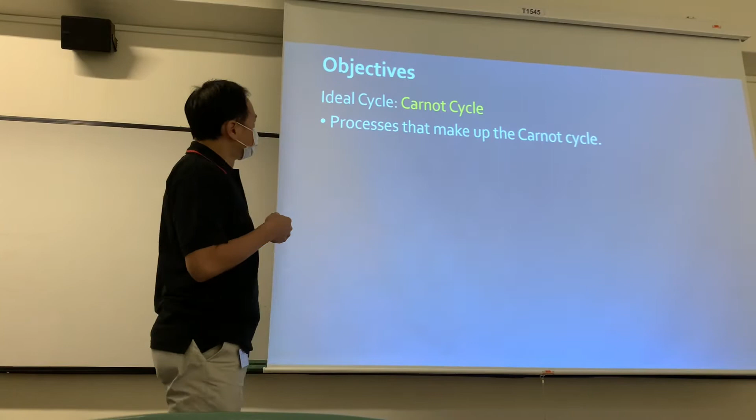Ideal cycle. When we say ideal, what does that mean? Ideal means this is already the best. But best doesn't mean it can be implemented. So sometimes it cannot be implemented.

We're going to learn what are the processes that make up the Carnot cycle, and we're going to use the TS diagram to describe the cycle. This is very important, because what you learned in chapter 2 you're going to apply here, and also in Mr. Lim's class for the gas turbine cycle. You'll learn the Brayton cycle there, and again use the TS diagram to describe it.

It's the same, because the gas power cycle is also part of the power cycle. The turbine cycle is part of the gas power cycle.

After that, we're going to learn the Otto, Diesel, and dual combustion cycles. We'll learn the concept, the theory, and the calculation, and what are the assumptions for these air standard cycles.

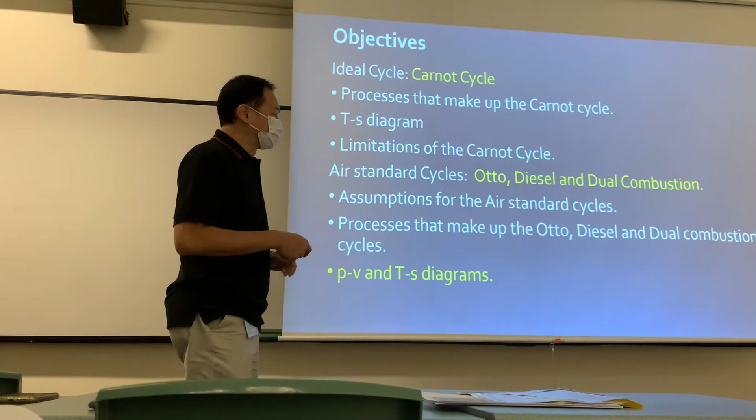The processes that make up the Otto, Diesel, and dual combustion cycles are important because you must memorize them, no choice. It's not like they'll be given to you in the blank. You have to memorize the processes that make up these cycles, and how to draw the PV diagram and TS diagram.

Again, how to draw it. Do you need to memorize it? I would say in a way, yes. But more important is your understanding. Once you understand, you will know how to draw it. Then you solve the problems.

Today I'll try to target finishing before 10 this weekend. That's the target, the first time. I'll try, you do your job, I do my job, and we can still finish in time. Okay, I know all of you are also tired.

Let's start with the first one, the Carnot cycle. This is a French guy who lived quite many years ago, more than 200 years ago. His name is Nicolas Léonard Sadi Carnot, a very long name, so the family name is Carnot.

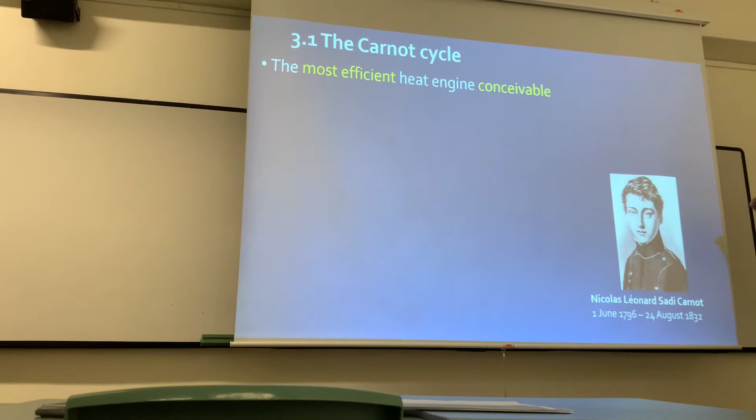So he came up with this idea called the Carnot cycle. This is the most efficient cycle that you can conceive. He was the first one to write this technical paper. He said that if you want the engine cycle to work well, you must have two processes: heat supply at constant temperature and heat reject at constant temperature.

You must have these two processes where heat is supplied at constant temperature—that's one process—then heat is rejected at constant temperature as well. In between these two constant temperature processes, these are constant temperature processes. Fixed temperature means constant temperature, so it's an isothermal process.

So between these two isothermal processes, you have an isentropic process, which is reversible and adiabatic. He said the best cycle is made up of these four processes: isentropic, isothermal, isentropic, then isothermal again.

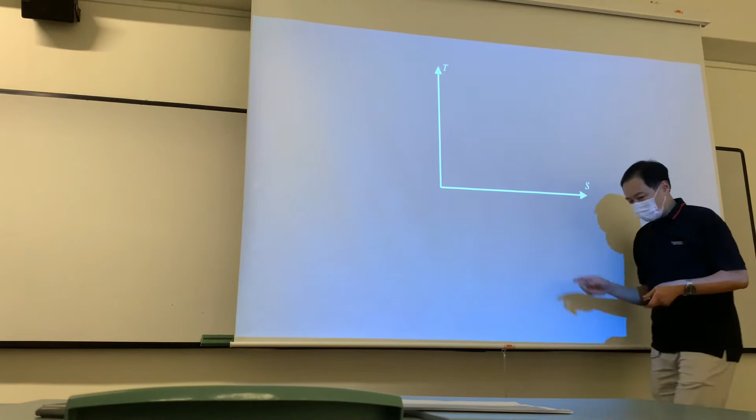In case you ask how it works, basically it works this way. To describe this process, we use the TS diagram.

First of all, we have heat supply at constant temperature, so we call it isothermal heat supply, a constant temperature process. In the previous chapter we said that when a process takes place, the area under the process line is the heat transfer. So this area is exactly the heat transfer. This is one process.

Then after this supply, you have isentropic expansion. This is where the work output takes place. Since it's isentropic, it's a vertical line with no change in entropy: S1 equals S2, the same entropy.

This is followed by another process called constant temperature heat reject, isothermal heat reject. Same as before, the area under the process is the heat transfer—in this case, it's the heat reject. So this area represents the heat reject.

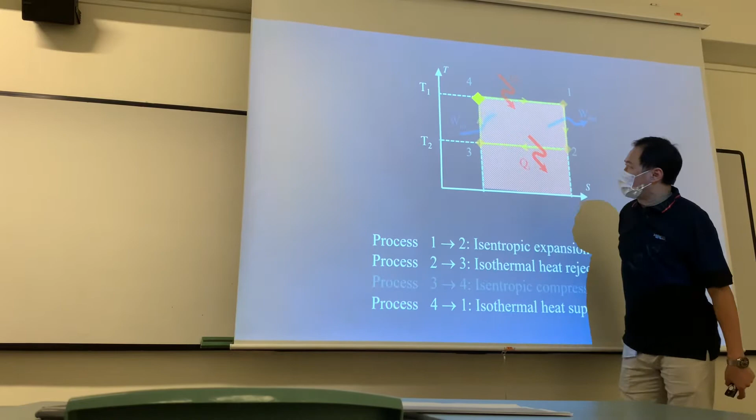Finally, you have a final process called isentropic compression. It's a vertical line again because there's no change in entropy—entropy S3 and S4 are the same. This is where work input takes place. So you have heat supply, work output, heat reject, then work input. This is the ideal Carnot cycle.

Based on what we learned earlier in the first law of thermodynamics, when we have a series of processes and finally return to the initial state, for example, like a car engine cycle, we have a process followed by another process, followed by another process, followed by another process, then the last process. So there are 4 processes that make up this cycle, then it comes back to the original point, back to the initial state. So when you have a thermodynamic cycle, this is one cycle, made up of process 1, 2, 3, 4, which make up this cycle.

When we apply the energy equation, which is the non-flow energy equation, to solve this cycle, from 1 to 2, 2 to 3, 3 to 4, 4 back to 1, the energy equation is Q minus W equal to delta U. Since we have 4 processes, I call it summation. Summation means the sum of all the heat, sum of all the work, is equal to the sum of all the internal energy change.

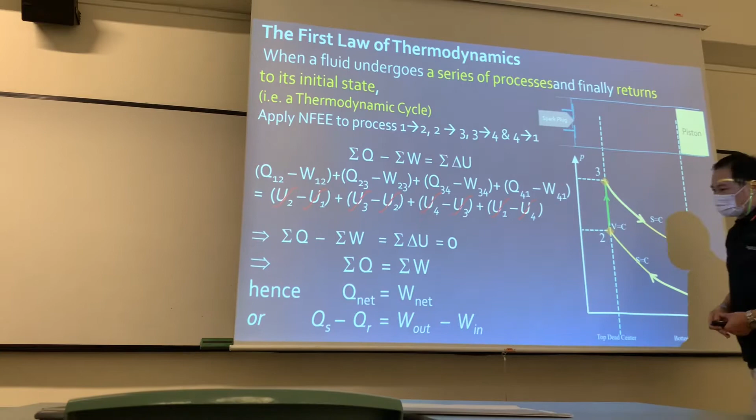So basically, if you want to calculate the net work of a cycle, where we have a process that comes back to the same point again, back to the initial point, you can use the net heat to calculate it. Net heat is the heat supply minus the heat reject. So meaning, if you want to calculate net work, usually we use work output minus work input, but we can also use heat supply minus heat reject to calculate it. We can use either one, the answer is the same.

So with this understanding, let's go back to the Carnot cycle. I think I covered this before, but I just mentioned it once, so in case you didn't understand, I will talk about it again. This is the second time I'm going to talk about this, because we're going to use this concept in our gas power cycle. So I'll start with the Carnot cycle. Just now, the Carnot cycle's T-S diagram looked like this.

So we say net heat equal to net work. Net work is work output minus work input, or heat supply minus heat reject, as I mentioned earlier. And when we want to calculate the thermal efficiency of the cycle, you just use the net work over the heat supply. So net work is work output minus work input, or you can use heat supply minus heat reject, that's why it's equal to heat supply minus heat reject, divided by the heat supply.

So now the question is, can you replace the heat supply and heat reject by the numbers here, T1 and S1, S2, S3, S4? Can it be done? Let's look at heat supply. Where is the heat supply? Heat supply is the bigger rectangle, this area here. How do we calculate the area of the rectangle?

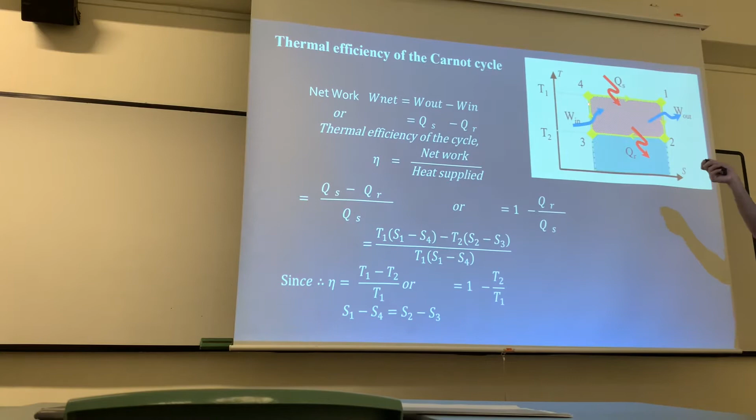So heat supply again below, so you have T1, S1 minus S4. Now look at this one. We said earlier this is an isentropic process, S1 is equal to S2, and here also isentropic process, S3 equal to S4. So basically S2 minus S3 is the same as S1 minus S4. So if these two are the same, I can cancel, so I'm left with T1 minus T2 over T1. Since S1 minus S4 is equal to S2 minus S3, I get this.

So meaning to say, if you want to calculate the thermal efficiency of the Carnot cycle, what you need to know is only these two parameters, T2 and T1. So you can calculate the thermal efficiency of this Carnot cycle. It's very easy to calculate, just based on this. This is the ideal cycle, the best efficiency you can find, given the pair of temperatures - one higher, one lower.

So if this Carnot cycle is the ideal case, why is it not implemented? I will ask you this question: can you heat up air? Let's say I have air. I want the air to receive heat, but temperature cannot change. Do you have a way to heat up air but it cannot increase temperature? But I want heat supply to go into the air. Possible? Almost impossible, I would say.

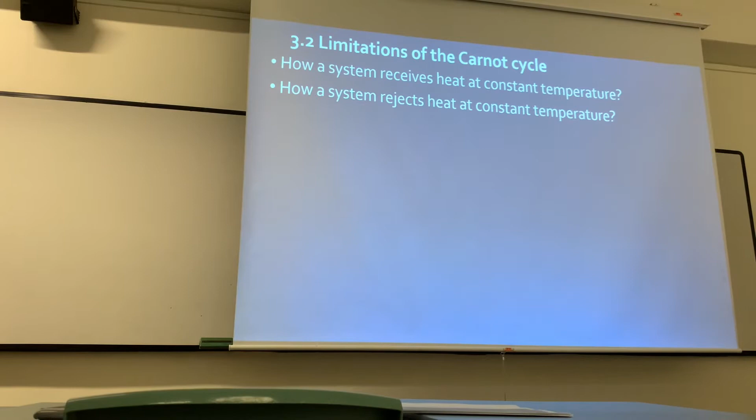So these two alone are already quite difficult to implement for a gas power cycle. It's difficult for the system to receive heat and reject heat at constant temperature. In practice, it's difficult to have a system receive and reject heat at constant temperature. Normally when we heat up the gas, the temperature should increase, and you may also increase the pressure, or you may keep the volume constant or keep the pressure constant.

Another thing is the Carnot cycle has a low work ratio. So what is work ratio? The definition of work ratio is this: based on the net work calculated earlier - I come back to this again - this is the net work, which is the work output minus the work input, or heat supply minus heat reject. So this is the network.

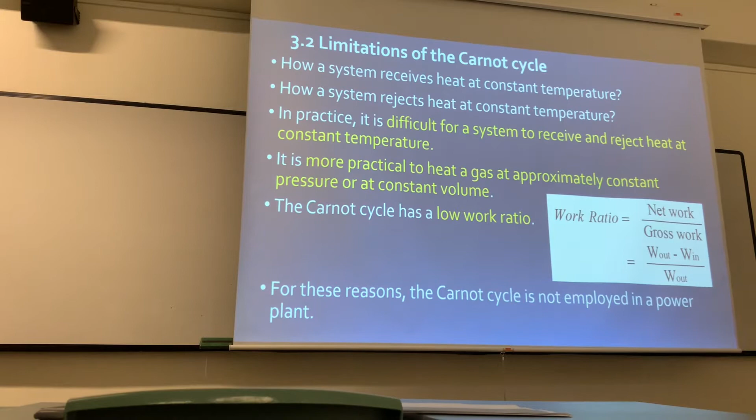So the net work divided by the gross work. What is gross work? Gross work is the work output itself. So work ratio, which is the net work divided by the gross work, the ratio is quite low. That's why the Carnot cycle is also not implemented. This is one thing, but the major concern is that it's difficult to heat up gas or reject heat from gas at constant temperature - quite impractical to implement. For this reason, the Carnot cycle is not employed in a power plant.

For example, in gas power cycle, this is a theoretical cycle but difficult to implement. So you may ask why this Carnot cycle, if people go and implement or publish technical papers saying Carnot is an ideal cycle. The reason is he didn't live long enough. He only lived until age 36. So if given him time, he would have come up with something even better.

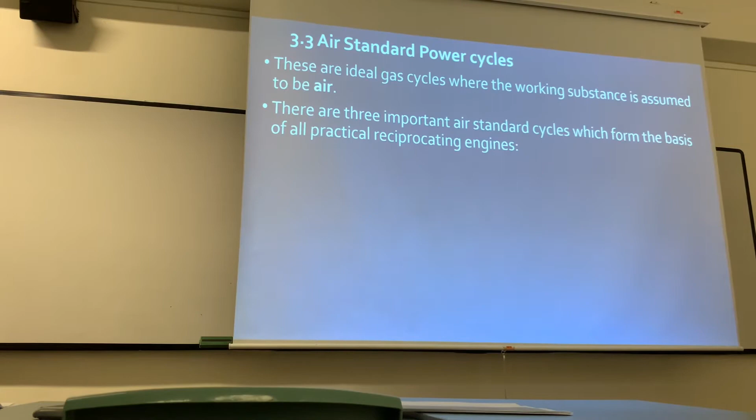So we're going to cover 3 important air standard cycles. We're going to cover these important ones because they are commonly used today, and these are the practical reciprocating engines run on the road today. The first one is the Otto cycle. Some of you may have heard of it before. So Otto cycle is used to approximate the petrol engine.

So you pump petrol, petrol engines run on this cycle. Next, diesel cycle. So diesel, everyone knows - you go to the petrol kiosk, you pump petrol, and there's another pump for diesel. So this diesel cycle is used to approximate the low speed diesel cycle.

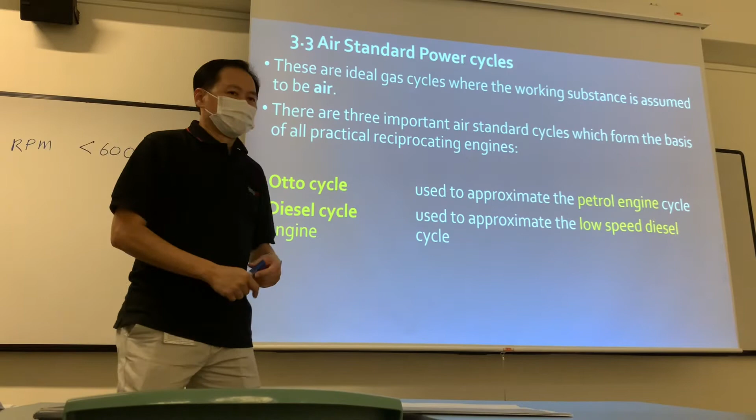So there's a word called low speed. What is this low speed referring to? The low speed, as far as I know, is talking about the RPM of the engine running speed. So during normal running with load, if the RPM is lower than 600 RPM, it's considered low speed. Normal speed is with load.

So then you look at the lorry, taxi, buses, which most of them use diesel engines - they use diesel fuel. Question is, are they running on this diesel cycle if the RPM is lower than 600 RPM? But you look at the lorry, the RPM easily hits 1000, 2000 RPM.

The buses also run 1000 plus, 2000, even 3000. The taxi is even higher - some diesel taxis, you look at the RPM, 4000 RPM also have. So under load, they are running at 4000 RPM. Are they still considered diesel cycle? No. So these are not the kind of engines used on the road for this cycle classification. Then where is this used? I'll mention about this later.

So those running on the road - diesel engines for buses, taxis, lorries - they are classified under what's called the dual combustion engine cycle. These are used to approximate high-speed diesel engine cycles. High-speed means the engine RPM is more than 600 RPM, under load, with running load, not idle speed. Under normal running load, if the RPM is more than 600 RPM, then you classify this engine under the dual combustion engine cycle.

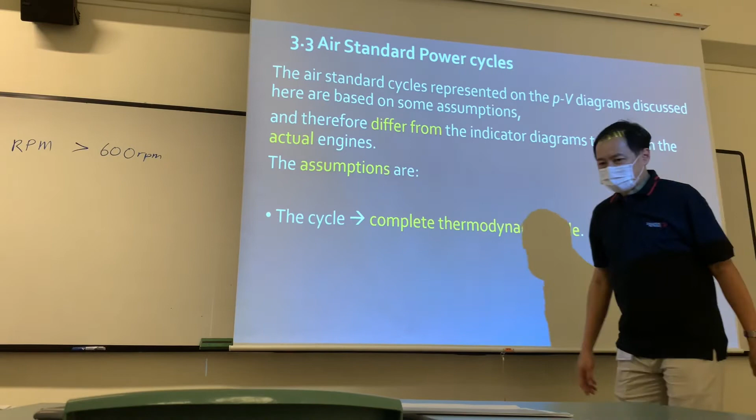And when we say complete thermodynamic cycle, we mean we are assuming the same amount of air in the cylinder, in the reciprocating engine cylinder - this air never goes out or comes in. So it's heated and expands, then under cooling it contracts. So this air is subject to heat but there's no change in chemical composition, no change in properties. So the working substance is air and is a constant property substance.

What do I mean? We do not consider that there is a change in chemical properties because we just treat air as an ideal gas, and the specific heat capacities are all constant. This is very important because this makes the major difference between what you learn here and what you're going to learn in Mr. Lim's class, which is the turbine cycle. Because in the gas turbine cycle in Mr. Lim's class, this is the difference.

I say this air is an ideal gas with constant specific heat capacity. In the gas turbine, we will consider that combustion takes place. What do I mean? I'll give you a simple example. The air that you breathe consists of 78% nitrogen. How many percent oxygen?

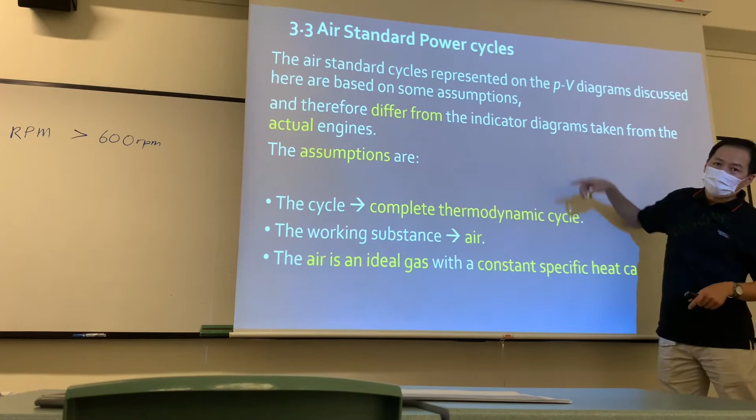But in this chapter, we assume no change because it's a complete thermodynamic cycle. So you just add heat to the air, then the air expands. Then you add work done to the air, then you compress the air, and then you lose heat. Then it contracts, something like that.

There's no change in the amount of air - meaning you do not let the air come in or go out. It's the same amount of air, keep on doing the work. You add heat, expand, then you lose heat, then you compress again, then add heat, you expand. So it keeps doing this kind of thing.

So it's different from the turbine cycle, where air coming in is combined with the fuel, then combustion takes place. Because of combustion, the property of air changes. That's a major difference here.

Also, all the processes in the cycle we study here are reversible. This is also another important thing, because coming to Mr. Lim's class, the expansion process, especially, or sometimes even the compression process, is not reversible, which makes things even more complicated.

I don't want to confuse you, but let me assume everything is reversible, everything is constant, the properties are all constant. So the property of the gas is air, and this air has the same property no matter where it is - the property doesn't change. This at least makes your calculation a lot easier.

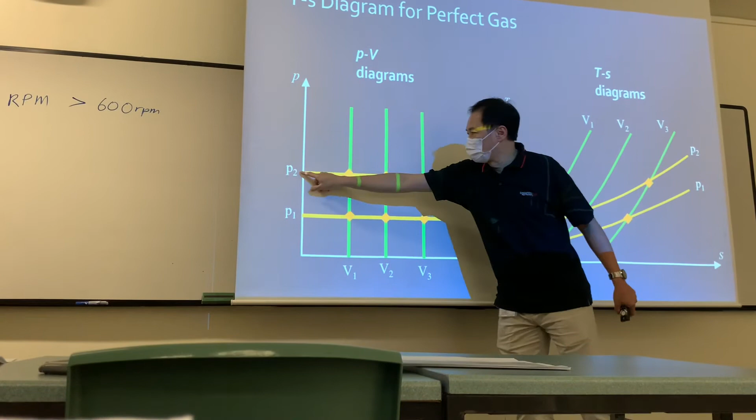Let's say you have another pressure P2 - same thing, I have these 3 points here. This point, which is P2 and V1, corresponds to this point, P2 and V1. This is how we relate the two points. P2 is the high pressure, so you just draw it higher.

So if you have a constant volume process on the TS diagram, it is this one, and on the PV diagram it is vertical. This is the constant volume process - one more time, constant volume process, then come back. So this is how we relate the constant volume on the TS diagram and PV diagram.

And how about constant pressure? Constant pressure looks this way. So I have this constant pressure process from point 1 to point 3 - from point 1 to point 3 this way, then reverse, come back. This is how we relate the two diagrams, the PV diagram and TS diagram.

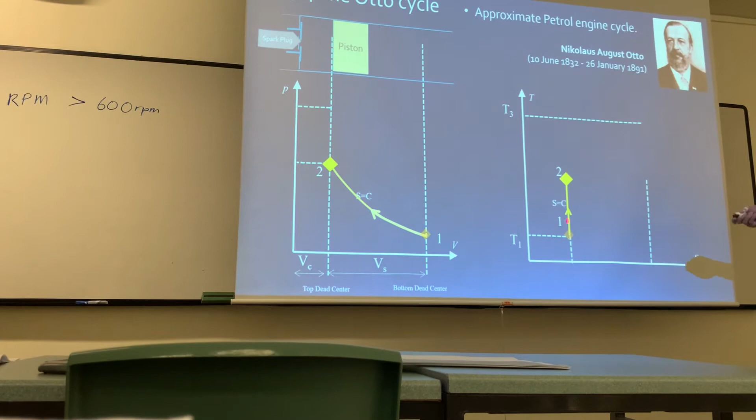Then heat is added to the air. Inside is air, and after you compress the air to very high pressure, you supply heat to it. In the actual engine, heat is supplied by the spark plug igniting the fuel mixture, causing combustion. But in this ideal cycle, we say the heat is added from outside to the cylinder.

This happens very fast, so fast that the piston hasn't moved before the combustion or heat supply is finished. That's why it's a constant volume process - heat is added to the cylinder but the piston hasn't moved yet. So after the heat is added to the air inside, the pressure becomes very high, and the temperature also becomes very high.

Then what next? This high pressure air will push the piston down. This is where the work output takes place - you push the piston down and do work. Behind the piston you have the connecting rod and crankshaft, causing the engine to run and rotate because of this work output. So what kind of expansion is it? Isentropic expansion.

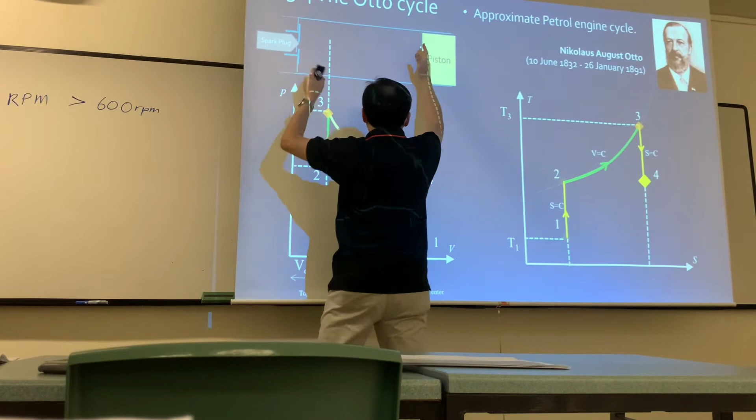After the air expands to this point, the pressure drops and the temperature also drops, but this temperature is still higher than the original point. Then you have this constant volume heat reject - the volume remains constant and you lose heat to the outside environment.

So there's no change in volume here - you can see it's a constant volume line. This completes the Otto cycle. So there are four processes.

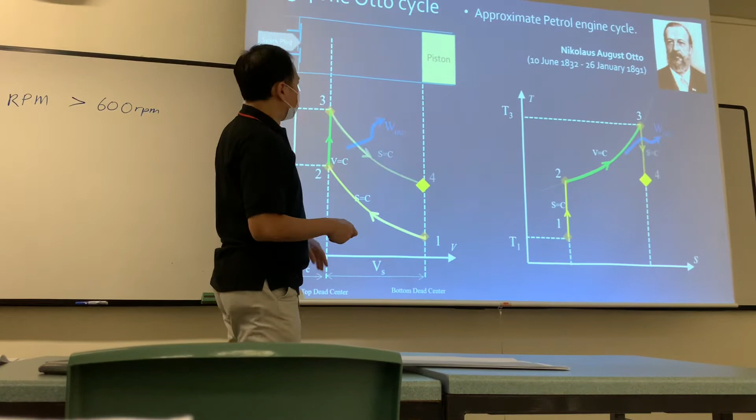One more time: isentropic compression - the piston compresses the air from this point to this point. Then you supply heat to the air inside - pressure increases, temperature also increases. Then the high pressure air pushes the piston down and does work - this expansion is isentropic expansion. After the expansion, the temperature is still very high at this point. Then you have a constant volume heat reject - the heat rejects to the outside at constant volume. So this is the ideal Otto cycle.

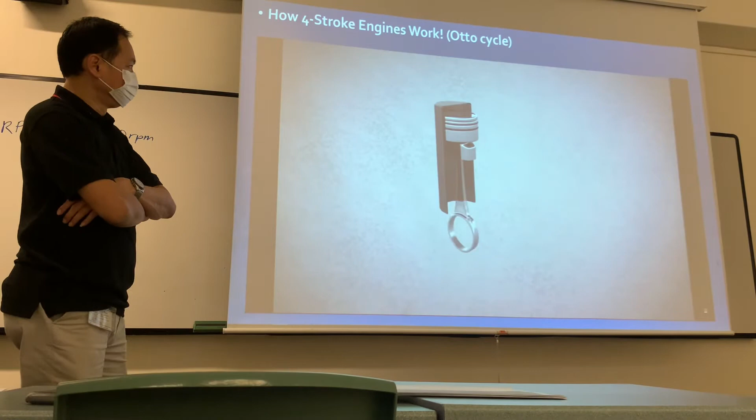The pistons connect to the crankshaft through a connecting rod. The crankshaft transmits the rotational movement to the gearbox and consequently drives the wheels of a car or motorcycle.

Two camshafts are installed on top of the cylinder, which control the intake and exhaust valve. The camshaft is connected to the crankshaft through a belt. More often than not, the crankshaft to camshaft gear ratio is 2:1, which means that for every 2 revolutions of the crankshaft, the camshaft will rotate only once.

An Otto engine has a spark plug that uses an electric spark to ignite the fuel charge. A four-stroke Otto engine is an internal combustion engine in which the piston completes 4 separate strokes.

The first stroke is called the intake stroke. Here, the intake valve is opened by the rotating cam, and the air fuel mixture is sucked into the cylinder.

The second stroke is the compression stroke. The intake valve is closed and the air fuel mixture is compressed to a high degree by the piston. The higher the compression ratio, the more mechanical energy the engine can squeeze from the air fuel mixture. Higher compression ratios, however, make self-ignition more likely.

The third stroke has been named the power stroke because this is the process where power is produced. The air fuel mixture explodes, and the force created by the explosion causes the piston to move down.

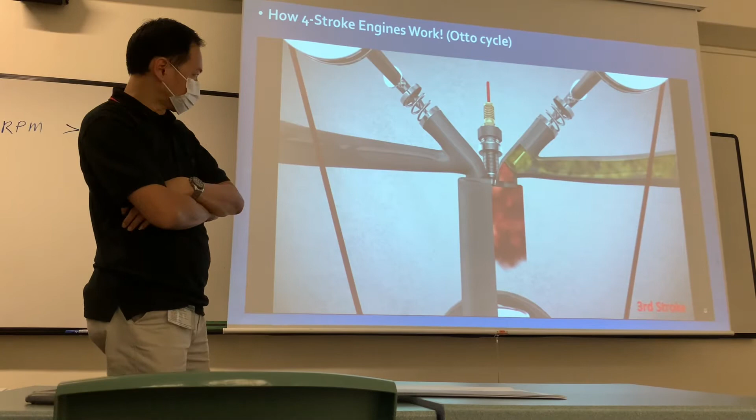The fourth stroke is called the exhaust stroke. In this stage, gases remaining in the cylinder are removed through an exhaust valve. The crankshaft transmits the rotational movement to the gearbox, and the driver can drive. Often, engines of today feature more than one cylinder to power cars or motorcycles in order to increase speed and smoothness.

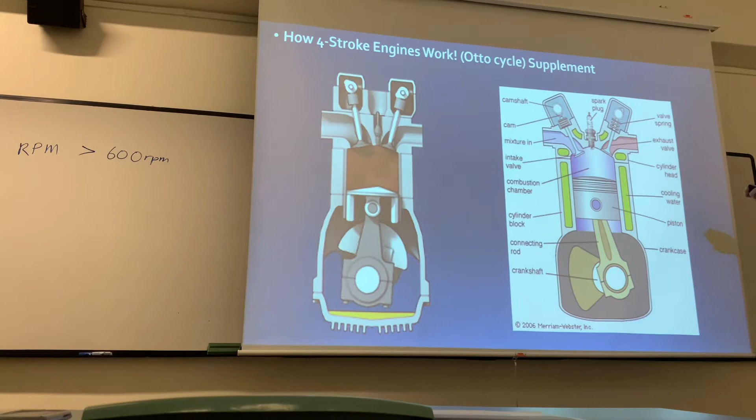Okay, this is the basic construction of the engine block of a petrol engine. So normally in a petrol engine, you will see the cylinder head, where you have the intake valve and the exhaust valve. Then for a petrol engine, you definitely will see this item called the spark plug, here. Then you have this piston, where it slides inside the cylinder, so this is the cylinder here.

So the piston is connected to the crankshaft through this thing called the connecting rod. And the piston movement causes the crankshaft to rotate. So this is how the linear motion transfers to become rotational motion. This is how you transfer the motion.

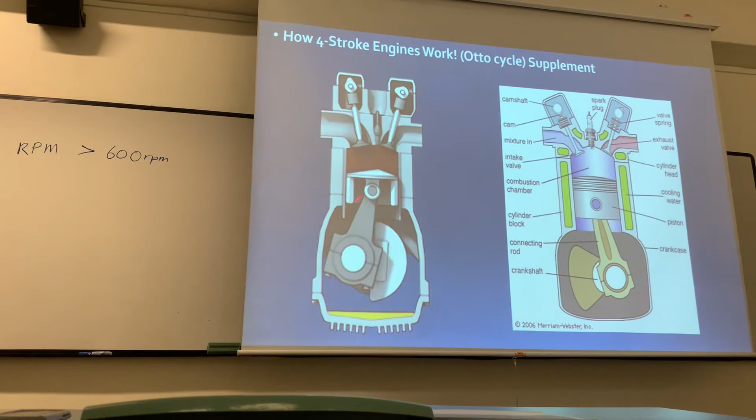So basically how it works is: air coming in, then compress, then combustion or heat supply, then exhaust. Very quick, huh? So what I show you here is the 4-stroke engine cycle. So in this 4-stroke, the piston moves 4 times: 1, 2, 3, 4 times.

So in these 4 times, in case you wonder where the fuel is, in the actual engine, previously, the fuel was injected before the intake valve. But today, some engines have direct fuel injection, meaning the fuel injector is installed right after the suction valve. Because of this latest technology, the construction is very different.

What's the purpose? Better fuel efficiency. Better efficiency. And this, if I have time, I will explain a bit more on that another time.

Okay, so this is the 4 stroke. The suction stroke, where the air comes in, then you have the compression stroke, which is the isentropic compression. Then you have the power stroke, which comprises 2 things: the combustion of the air, or so-called heat supply inside the air, causing isentropic expansion, then followed by the exhaust, meaning you push out the exhaust gas. So in the ideal gas standard Otto cycle, you only look at this.

So you do not take this into consideration. The heat supply of the air we consider is a constant property air. You do not have combustion, just heat added from outside the cylinder and heat rejected from the cylinder to the outside. So it's slightly different in this area, slightly different.

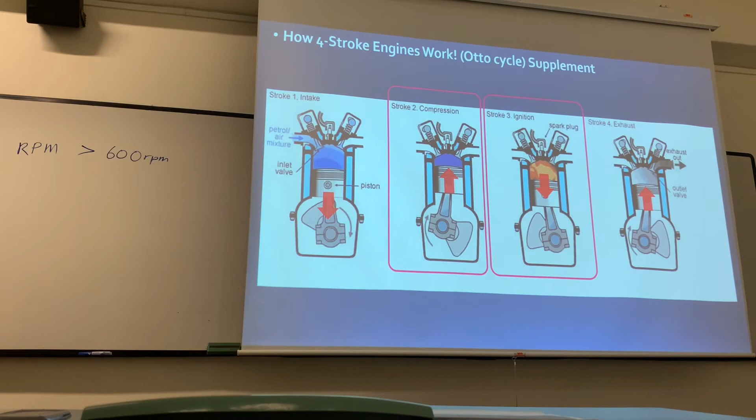So the piston slides from this position to this position, as the video mentioned earlier. This position is called bottom dead center. Then the top position, the highest position, is called top dead center. So the piston slides between these 2 positions.

So if we ask, can the distance keep changing or not? The answer is no. The piston moves from here to here, and that distance is always fixed. It will not change during operation. The car engine is made this way, this is how it moves. You cannot say, can I move a bit further, or can I lower it a bit further?

No way, because the car engine's crank mechanism, the way it's designed, once it's fixed, it cannot change. So the volume that the piston sweeps through is called the swept volume. In layman's terms, we call this engine displacement. So when you buy a car, you normally look at the car catalog, and they tell you 2000cc, 3000cc. This refers to the cylinder displacement, what we call swept volume.

How do you calculate this volume? Very easy, it's a cylindrical volume: pi d squared over 4, times L, where d is the diameter and L is the stroke. So this is the displacement.

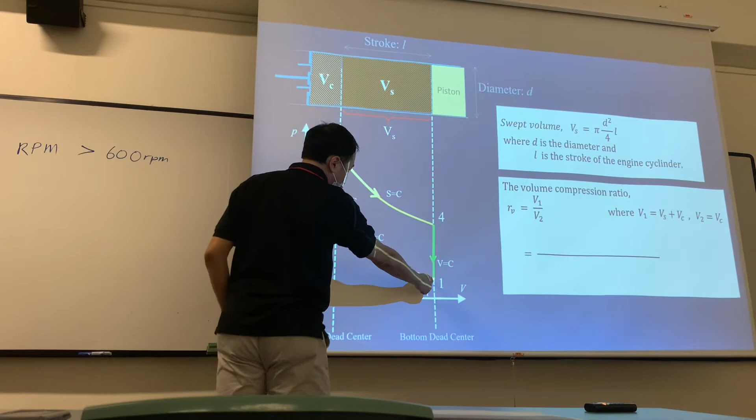Looking at the PV diagram, this is V1, the volume at point 1. After you compress, it becomes V2. So this ratio is calculated by V1 divided by V2. That's how you calculate it.

Now look at V1. This comprises two volumes: the swept volume and the clearance volume added together. V2 is the clearance volume itself. So to calculate the volume compression ratio, you add the swept volume and clearance volume together, then divide by the clearance volume again.

So this is how we calculate the volume compression ratio. Let's look at a catalog to relate this. This is a very common car on Singapore roads, the Mazda 6. Looking at this engine catalog, you see 4-cylinder, DOHC, meaning double overhead camshaft, 16 valve—this one isn't related to our topic here.

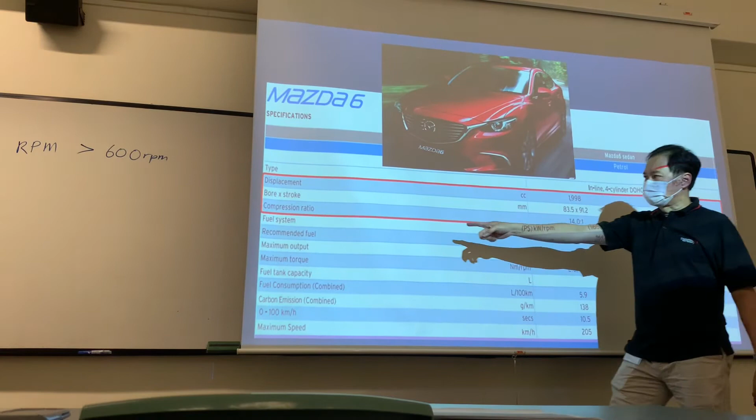More important is the displacement. It's about 1998cc, almost 2000cc, so about 2 liters. Then another engine option is 2488cc. These are the swept volumes. Since they are 4 cylinders, dividing by 4, each cylinder is about 500cc. How about the cylinder size? Also given to you is the bore times stroke—bore means diameter, times stroke, which is L.

Then you see the compression ratio, this is the volume compression ratio: 14 to 1, 13 to 1. Now, I mentioned earlier that some fuel injectors are inside the cylinder—this is one of them. Fuel system, direct injection, meaning the injection is directly inside the cylinder. But this isn't our topic today, just something related.

Anything else? Okay, so normally when you buy a car, or any vehicle, what you're concerned about is whether the fuel consumption is good or not. So you look at this—do you want to buy a car whose fuel consumption is like drinking water?

You know what 'drink water' means? It means today you pump petrol, and two days later you need to pump again. Even taxi drivers, who drive the whole day, don't pump petrol every day. So two days is considered quite fast already, but they drive every day. If you're a normal driver driving only a certain distance and you need to pump petrol every 2 days, that's considered quite frequent—it means your fuel consumption is very bad.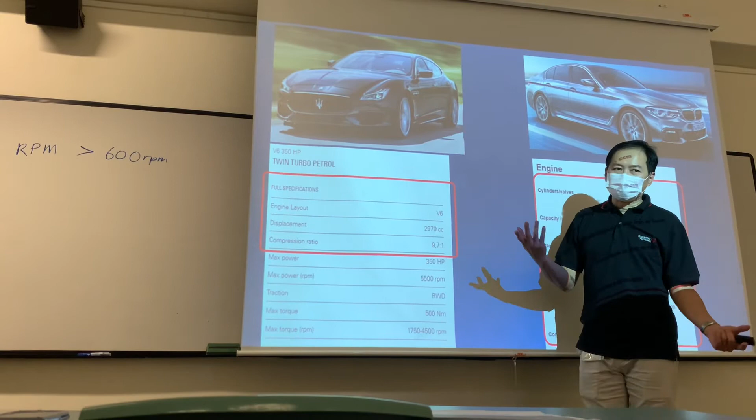The compression ratio for this one is on the low side, it's 9.7 only. But this is a double charge car, double charge, that's why the compression ratio is not very high, because you have another turbocharger. Turbocharger is the pre-compressed air.

This one is 4 cylinder, this is BMW, so it's 2000 cc, so one cylinder is about 500 cc again. Then compression ratio is 10 to 10.2, slightly higher than this one.

So what you learn is the displacement, the swept volume - this is the swept volume. Compression ratio - this is the compression ratio. Okay, so this is the one.

So when it comes to calculation, you see this table, scared. Don't be scared, this one is given to you. So you must be familiar with this table, how to apply it to do your calculation. This will be given to you. But as I always say, if I give you something and you do not know how to apply it, you can only look at it but don't know how to start. So you must be familiar with the whole thing and know what to use at the right time.

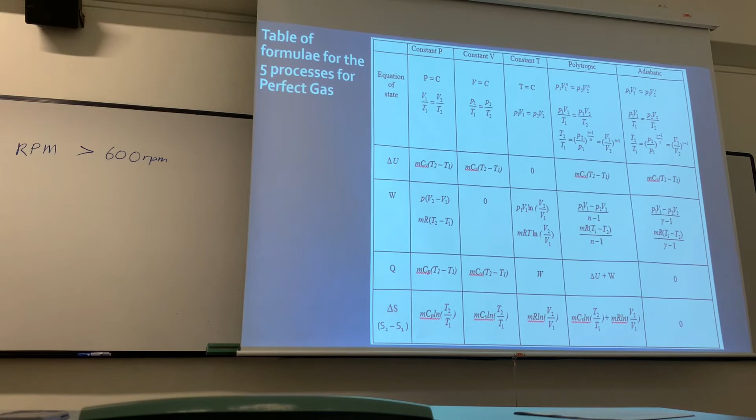Okay, what to use. So let's come back to the Otto cycle, and I start with isentropic compression. Just now I said isentropic compression means you compress the air from point 1 to point 2, isentropic compression. This is where the work input compresses the air. So isentropic compression for the TS cycle is a vertical line. So this is the isentropic process.

So isentropic, still remember, is a reversible adiabatic process. So reversible adiabatic, I look at adiabatic in this table. Just look at this table alone, just adiabatic. Okay, now I want to calculate what? Temperature and let's say pressure at point 2. So what should I do?

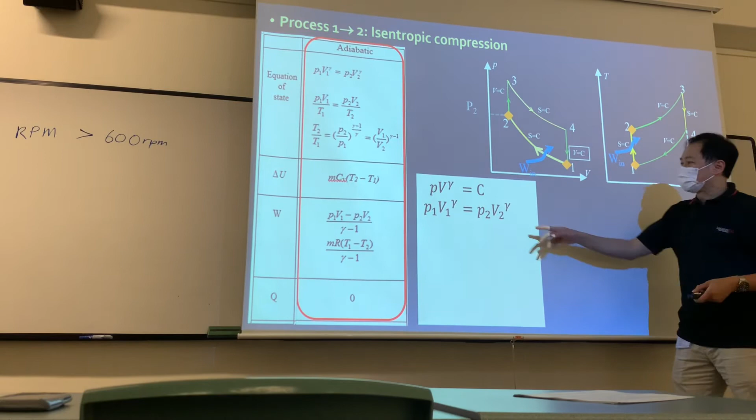I want to find the pressure at point 2. So what I do is look at this pressure related to volume. Why volume? Because I can change the volume to a volume compression ratio. How do I change it? Okay, I just shift my V1 to the right side, and I shift my P2 to the left side. Then V1 to the right side, then it becomes like this. So V1 divided by V2 is the volume compression ratio. So this is how I calculate the P2.

So V1 over V2 is the volume compression ratio. So this is finding pressure. Next I want to find the temperature. Find the temperature here. So to find the temperature, what should I do? Okay, I'm going to use the temperature here.

Respect to the volume again. I always refer to volume because volume I can change to a volume compression ratio. So what I do is, okay, let's write this equation here. So you can see this V1 over V2 is the same as this one, it's a volume compression ratio. So I put it as volume compression ratio, RV. T1 I shift to the right side, multiplied. So this is how I use this to get the temperature at point 2.

So this is the first process, isentropic compression. This is a closed system process - closed system because no air flows in, no air flows out. Throughout the whole cycle, we never talk about the valve opening and closing. Consider the valve as never open before, so the same amount of air keeps on compressing and expanding. Okay, the same amount of air.

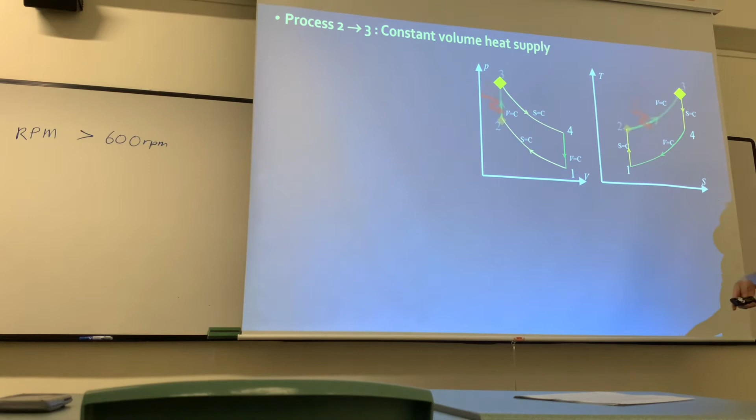Okay, next we have the constant volume heat supply. How is it supplied? Constant volume, no change in volume. So constant volume line. Since we are talking about constant volume, in the formula table I look at the constant volume only. So if you want to find the temperature after the heat supply, what is the temperature here? So I look at here - temperature and pressure, I only have these two items.

So to find T3, I shift my T3 to the left side, so T3 equals T2 times P3 over P2. This amount of heat supply can be calculated based on the equation provided here. But take note, this is capital Q. So MCV times T3 minus T2, capital Q here. This is the second process, constant volume heat supply.

Next, isentropic expansion. You expand from point 3 to point 4 isentropically. Isentropic means no heat transfer, but also no change in entropy, vertical line here. So since this is isentropic again, we look at the reversible adiabatic column, still the same table, same column again.

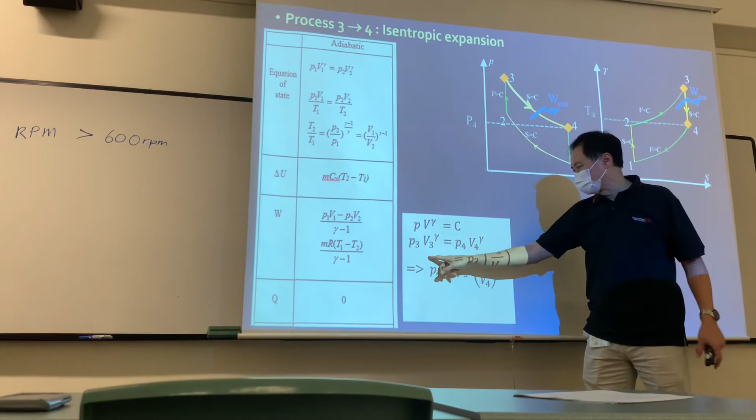Then shift the V4, P4 to the left side. I shift this one here. Basically this V4 goes down, so it becomes divide. So I just swap the position, so it becomes P3 times V3 to the power gamma divided by V4 to the power gamma. But now what is V3 over V4? I'll talk about this in a moment.

So let's do the other one first, which is T4. How to find this T4? Same thing, I will use the same table, temperature related to volume. So same like this case, I need to change the number: 1 becomes 3, 2 becomes 4. I change the number accordingly.

So I just shift my T3 to the right side since what I want to find is T4. Now the interesting part is here. You look at this PV diagram, V1 and V4 - is it the same volume? Same or different? Same. So this V4 is the same as V1, so I can replace V4 with V1 here. How about V3? Is it the same volume as V2? Same. So V2 and V3 is the same, so I can change this to V2.

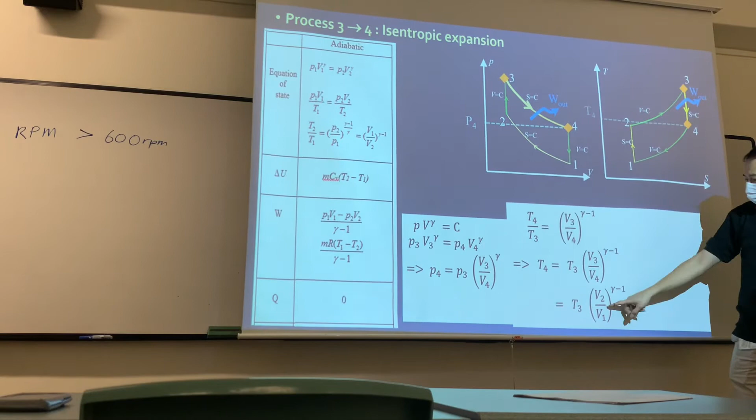So basically what I'm going to do is change V3 to V2, and V4 and V1 being the same, change to V1. So this becomes like this. Then, as we said earlier, compression ratio is V1 over V2, which is Vs plus Vc over Vc. Now I have V1 over V2 is R, the compression ratio. How about V2 over V1?

So it becomes the invert of compression ratio. If you cannot catch this, use a simple example: 8 divided by 4 is equal to 2. So then I put it the other side, 4 divided by 8. Can you see? Same thing - 2 equals 8 divided by 4, so 4 divided by 8 is 1 over 2, something like that. So this is how you invert. So do the same here - I'm going to invert this one.

So meaning to say, if I want to find T4, I use T3, which I looked up earlier, times 1 over compression ratio to the power gamma minus 1. So this is how I do the calculation at this point for temperature.

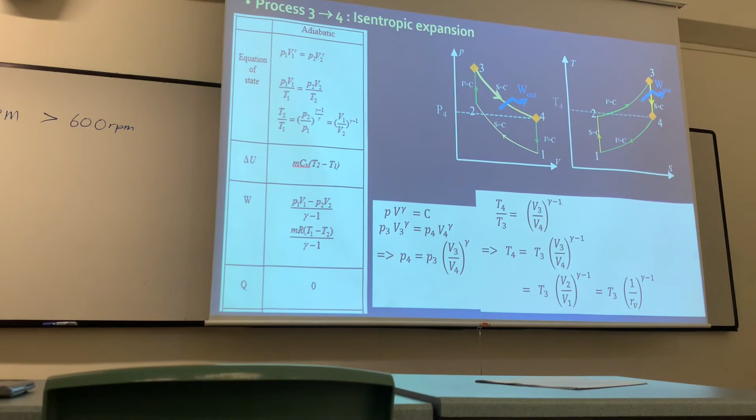Then the last process, from 4 back to 1. This is a constant volume process. So what you need to do here is use the temperature at point 4. So I can directly use this heat transfer equation here to find the heat reject at this process, the heat reject.

Okay, basically this heat reject can be calculated using this: MCV times T4 minus T1. I will do the change later, so in this case, this is MCV times T4 minus T1.

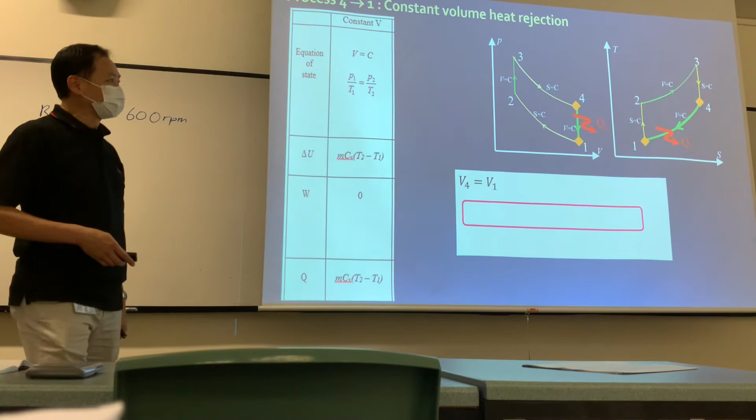So in summary, the total heat supply is the constant volume heat supply here. This is the heat supply, so MCV times T3 minus T2.

And the heat reject is at the constant volume heat reject here, so it's MCV T4 minus T1. So once you have these two, you want to calculate the work done.

Work done, I mentioned earlier, you can use the work output minus the work input. This is the net work. Work output is the expansion from 3 to 4, expansion work. Work input is from 1 to 2, compression work. So when you calculate, you can calculate using these two, work output minus the work input.

So if you ask me how to calculate these two, using the formula table, which is this table here, you can use this to calculate. Okay, adiabatic, calculate work done, you can use this one to calculate. But very tedious, very tedious. So can be done, but tedious.

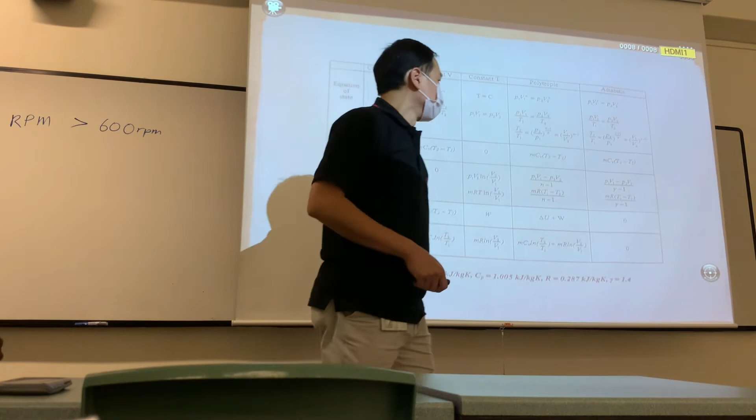So another way to calculate is, since we know the heat supply and heat reject, alternately to calculate the net work, we use the net heat, which is the heat supply minus heat reject. So this is another way you calculate and you get the same answer. Doesn't mean you calculate this way, you get different answer. It should be the same answer. Okay, this is provided there is no losses. No losses.

Okay, so once you get all this network and heat supply, you can go and calculate the thermal efficiency. Thermal efficiency, how to calculate is the network you calculated earlier divided by the heat supply.

Okay, so in case you want to use formula, I don't recommend you to use formula. Use formula means you have to derive something like this. You have to calculate your thermal efficiency this way. Then based on process 1 to 2, T2 is equal to this, then T4 equal to this. Then calculate this way, then put inside the formula. This is the formula. Then you simplify, become this.

This is the formula. And if you ask me, is this formula given? No, only this one is given. Only this first one is given. So this one is not given. So if you want to test your memory, if you memorize wrongly, sorry, you write wrong, you answer wrong, I mark you wrong. I can't give you marks if you do wrongly. That's the fact. Okay, so please understand. So the best is still calculate from the first principle, which is net work over the heat supply.

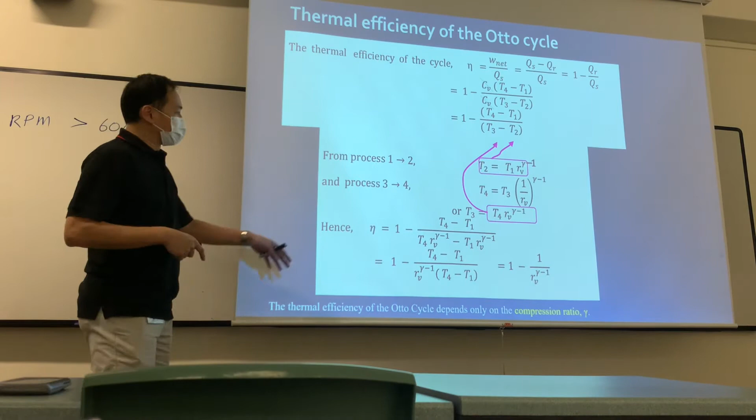First principle. So here I also want to show you something. For petrol engine, what affects the thermal efficiency of the petrol engine? Okay, the thermal efficiency, after you simplify until like this, you notice finally there's one factor here, which is compression ratio. The gamma is fixed already, 1.4. This one you can't change because it's fixed. So the only thing you can change is compression ratio.

So you notice that this compression ratio, how it affects the thermal efficiency. So if this compression ratio is a very big number, very high, so 1 divided by a big number to the power something, but it's big, then this becomes a small number. So 1 minus a small number becomes very big. So meaning, your compression ratio, the higher the better.

Okay, come to this part, compression. When you compress with a higher compression ratio, the pressure at point 2 will be very high. This pressure here will be very, very high. So your engine block must be very sturdy, very strong. That's one thing.

Secondly, this is the killing part. You compress to a high pressure ratio, T2 also becomes very high. So after you compress, the temperature is also very high because this is a high compression ratio. Imagine when you compress, you compress the air and fuel together, a mix of air and fuel, at this high temperature, let's say 1000-plus degrees C.

That's why for today's engines, the compression ratio you can see is 14, which is already very high. But now Mazda wants to test 15, 16. So let's see.

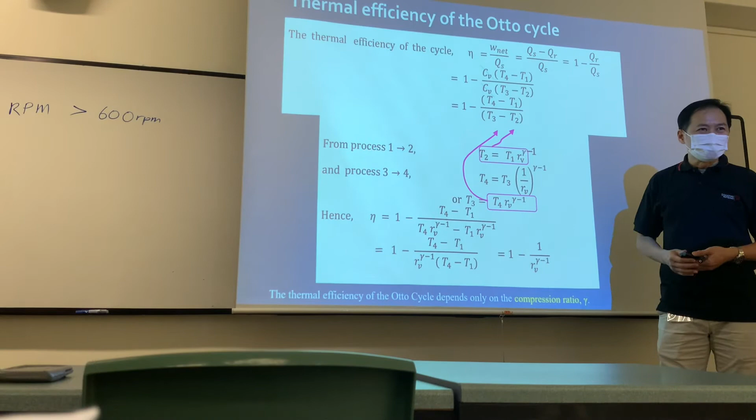This one? Yeah, okay, very good question. When I set a question asking you to derive from this, do you want me to test you? Oh okay, good, I will not test you.

I only ask you, I never ask the full-timers like that. Full-timers, I don't need to ask - I say everything in the textbook will be tested. Yeah, true, everything in the textbook will be tested, including this one. But to you, I ask you, you say no. Yeah. Good night. Huh?

Too late already, okay, let's do one example. Okay, talk, but never do. That's very quiet, let's do one example.

Okay, this is in your textbook. After doing this example, you can do the textbook tutorials. So at least there is one tutorial question on this - at least one tutorial question. I'll talk about this later on.

So let's talk about the textbook example first. Okay, this question is like this: the engine operates on the ideal Otto cycle. Very straightforward, they tell you it's an Otto cycle. Then this cylinder has a bore of 68 mm and a stroke of 80 mm. So they give you the information.

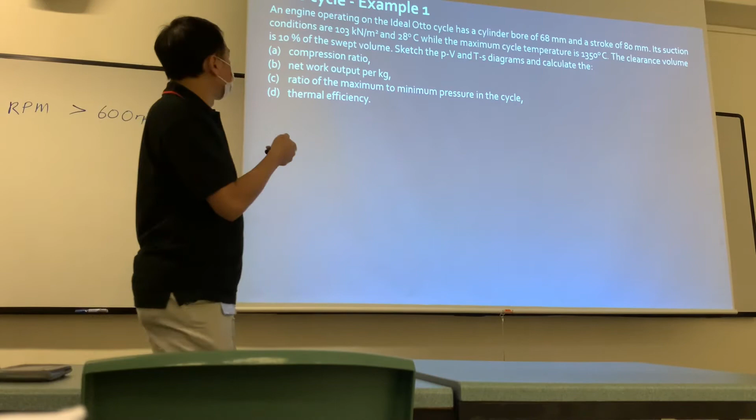Need to use it or not? It depends, see what the question asks later. So now the suction condition - suction is point 1, the very first point. The suction condition, the pressure - okay, when you see a unit like this, kilonewton per meter square, what is this?

Kilopascal, yes. Kilopascal is what kind of property? Pressure, okay, some students don't know. So this is pressure. This one you know - you see degree C, sure you know, every day you measure temperature before you go to work. Degree C, this is temperature. But again, when it comes to calculation, remember to convert this to Kelvin.

Then next, they say the maximum point temperature is 1350 degrees C. Okay, maximum point temperature 1350 - which point? Later when you draw the TS diagram, we'll know which point. Then next, they say the clearance volume is 10% of the stroke volume. Now sketch the PV and TS diagram. Okay, how to sketch?

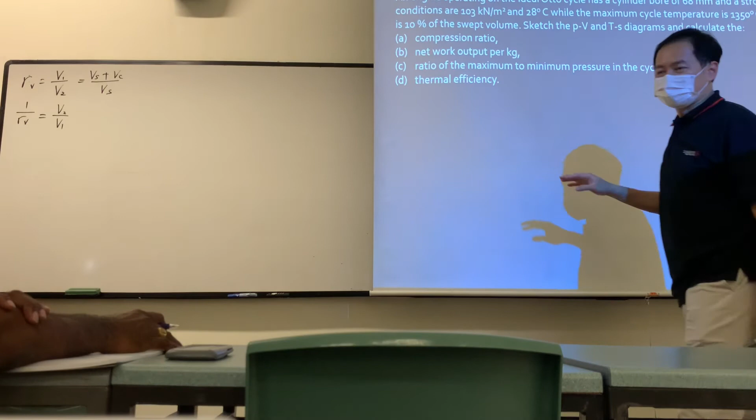Okay, this one needs to sketch. For my class, this chapter, you only need to memorize 3 cycles: Otto, Diesel, and dual combustion. Mr. Lim will start the turbine cycle the week after next.

And how many cycles do you need to memorize? Mr. Lim's one, turbine cycle, is separate. So at least 3, at least 3. You have to memorize, no choice.

Okay, so here, side by side, easy to compare. Normally I draw on the left side the PV diagram, and on the right side the TS diagram. So how to start?

I start from the first process, from this point. I call it point 1. At this point 1, I have an isentropic compression.

So I have an isentropic compression. This is a PV diagram, this is the curve basically. Sometimes my hand is not so steady, so it doesn't look very good.

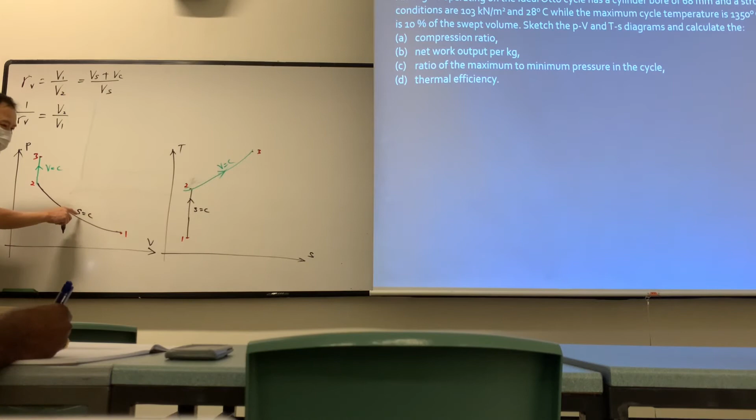Point 3 here. Just now was isentropic, so please indicate isentropic. What I write, S equal to C, means entropy S is equal to constant. So it means no change, just like P equal to C means no change in pressure.

So after the constant volume is applied, you have the isentropic expansion - another curve coming down. So isentropic expansion, until point 4.

So after that, the last process is the constant volume heat reject. Constant volume means no change in volume, so it's the vertical line again. On the TS diagram, constant volume line again.

So what do you need to indicate besides all this information? Pressure and temperature, yes. And what else? Anything else you need to indicate? Right, volume.

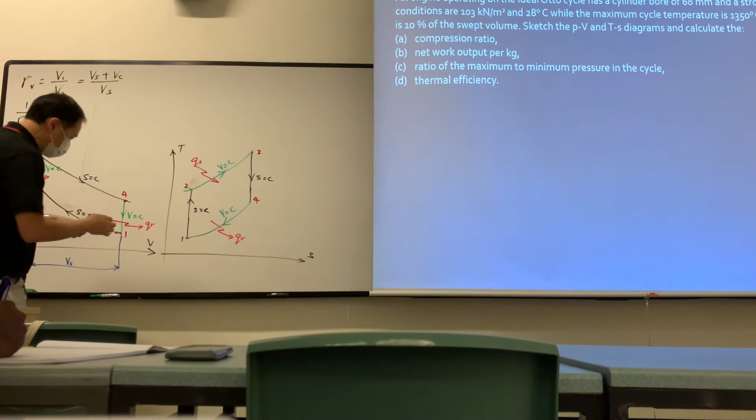The first point pressure is 103. So this first point, the pressure is 103 kilopascal, kilonewton per meter square. And the temperature is 28 degrees C. So the temperature here at point 1, 28 degrees C. If you convert to Kelvin, you plus 273, 301 Kelvin.

And the maximum - the maximum, yes very good. Maximum is 1350. You look at the TS diagram, which one is the maximum point? Point 3, very obvious that it's point 3. So it's 1350 degrees C, you plus 273, 1623 Kelvin.

So now I take this out so that I can write something here. Okay, now they want you to calculate the following things. First one, compression ratio, which is this - V1 over V2, which is Vs plus Vc over Vc, compression ratio.

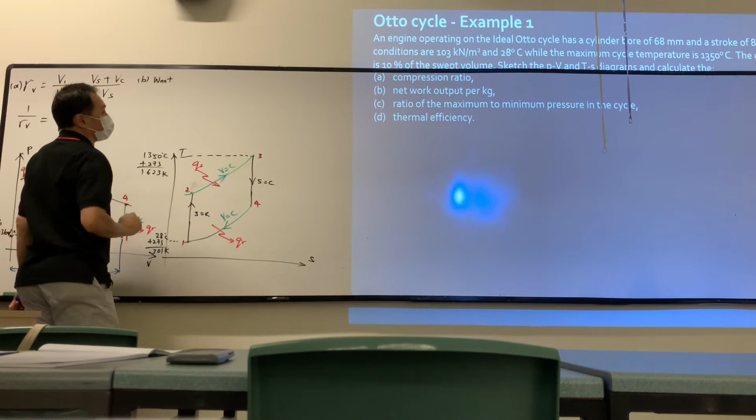Next one, calculate the net work. Net work is the work output minus the work input. Or you use the heat supply minus the heat reject. To calculate the net work per kilogram of air, you can use the work output minus the work input, or use the heat supply minus the heat reject.

So now, how to calculate the heat supply? How to calculate the heat reject? You must know the temperature to calculate the heat supply. Same for the heat reject, you must know the temperature in order to calculate it. So this means you need to find the temperature of all 4 points.

Then next, calculate the ratio of maximum pressure to minimum pressure. So you look at the PV diagram, maximum pressure is this point, point 3.

P3 is the maximum pressure, and minimum pressure is P1. So you must find P3 later on in order to calculate this ratio. P max over P minimum is based on P3 divided by P1. So then next, the thermal efficiency.

Thermal efficiency is always defined as net work divided by the heat supply. So if you copy the net work from here and put it here, you divide by the heat supply to get the thermal efficiency. Everything starts with the heat supply and heat reject, for which you need the temperature.

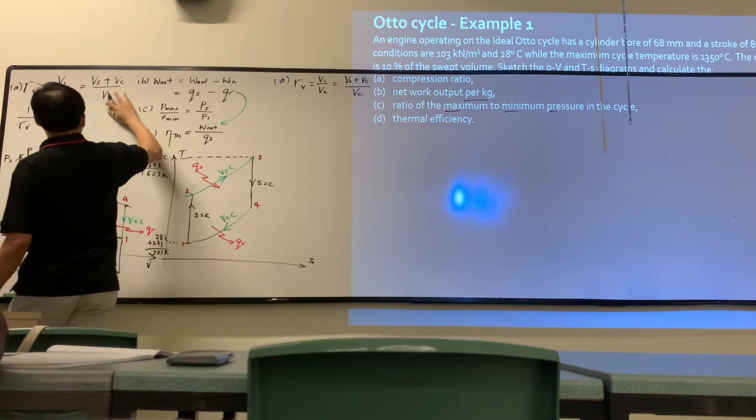Now the question is, do we need to calculate the volume in order to calculate Vs plus Vc over Vc? You can calculate the volume to get this, but that's the long way. The shortcut is, all I need is the ratio.

What ratio? They say the clearance volume is 10% of the swept volume. So I only need this alone to calculate the compression ratio. So this is how I'm going to do it.

So Vs plus Vc, which is 10% of the swept volume, that's 0.1 Vs. So 10% is 0.1 without fraction. Divide by 0.1 again of Vs. On top you see Vs plus 0.1 Vs, this is equal to something like A plus 0.1 A.

So you get 1.1 A. Can you see the picture? This is almost like A plus 0.1 A, so you get 1.1 A. So Vs plus 0.1 Vs gives you 1.1 Vs over 0.1 Vs. Once you have this, the Vs terms cancel, so you have 1.1 divided by 0.1, which eventually gives you 11. So this engine's compression ratio is 11. That's all.

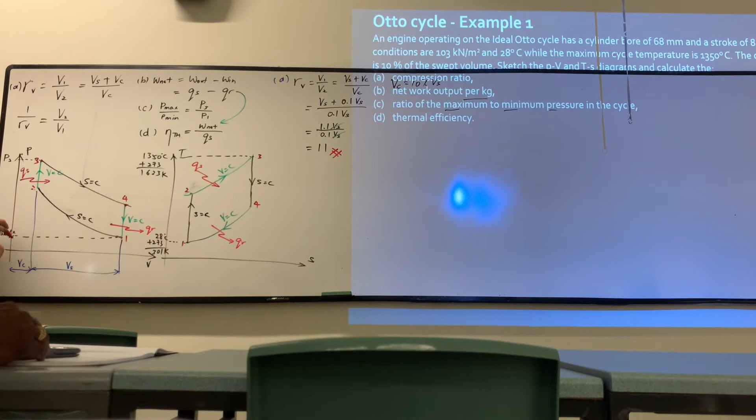So after this, let's look at the formula table. If you are not given the compression ratio, use this to calculate it. Some questions give you the compression ratio directly, then you can skip this part. If it's not given, you have to calculate it, otherwise you cannot proceed with the rest.

After this is done, secondly we need to find all the temperature points. Remember, we need the temperature in order to calculate the heat supply and heat reject. They will give you information like the clearance volume is how many percent of the swept volume - that also works.

Yes, okay. Compression ratio is not given - they will give you the clearance volume as a percentage of the swept volume instead. Okay, let's come back. So now we need to find the temperatures.

So you see how many points you have? You have 1, 2, 3, 4 - four points. But point 1 temperature is given already, and point 3 is also given already. So we need to find the remaining points, point 2 and point 4. But you cannot just jump straight to point 2 then point 4 - it's very difficult to get the answer.

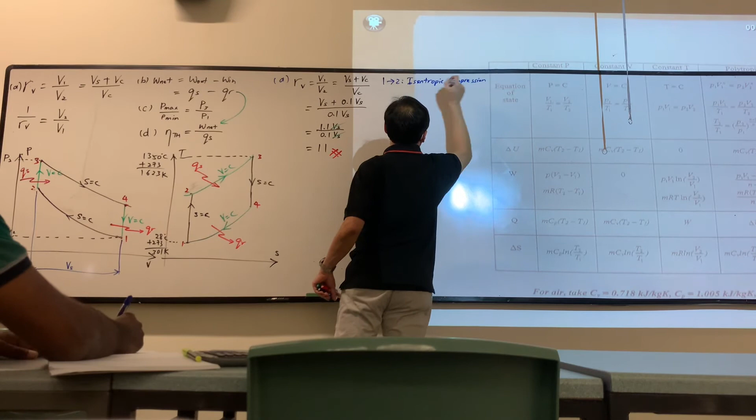I don't know, so which one are you doing? Question B, is it? I haven't done question B. Oh okay, let me find all the temperatures first, then I will do question B.

For question B, I need to find heat supply and heat reject, and these depend on the temperature. So far I only have two temperatures, 1 and 3, so I need to find 2 and 4. We go step by step: find all the temperatures first, then do the calculation of heat supply, heat reject, and the rest. This is my recommendation for how you do it.

Start from the first process, 1 to 2, isentropic compression. First I want to find the temperature at point 2. To find the temperature at point 2, I use isentropic, meaning adiabatic process. So adiabatic is this one. And to find the temperatures, T2... yeah, I shifted a bit, you cannot see the power.

To find the temperature, use T2 over T1 equal to V1 over V2 to the power gamma minus 1. Where this V1 over V2 is rv, the compression ratio. So let's do it here. T2 over T1 equal to V1 over V2 to the power gamma minus 1. V1 over V2 is compression ratio, so rv to the power gamma minus 1.

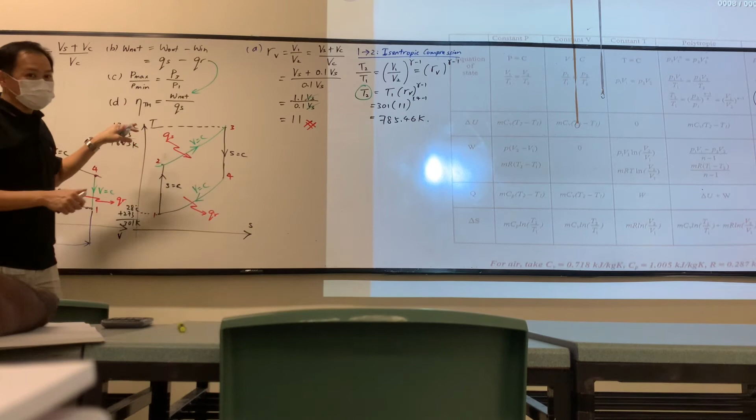Okay, so now you have T2 already, T2 is all done. Next I want to move on to T4, but we cannot - if you jump this way you will have a problem. So I suggest you go to the next point, T3 first, from 2 to 3, slowly one by one. It happens that T3 is given to you, so it's a lot easier, but I will still suggest you do T3.

So from 2 to 3, this is a constant volume supply. Now, temperature at point 2 is already found, temperature at point 3 is already known. Let's find the heat supply at this process, which is this one.

Constant volume: MCV, M CV T2 minus T1, so it's T3 minus T2. Change the numbers accordingly, but this is capital Q. I'm going to change this to small q per kilogram, so divide by M, this becomes CV T3 minus T2. We divide by M, Q divided by M gives us small q, so this one divided by M disappears. So Q23, from 2 to 3, equals CV times T3 minus T2.

So CV is 0.718. 1623, okay, 1623, correct. Minus 785.46, 146 - what do you have? 601 kilojoule per kilogram of air. Okay, so this is from 2 to 3.

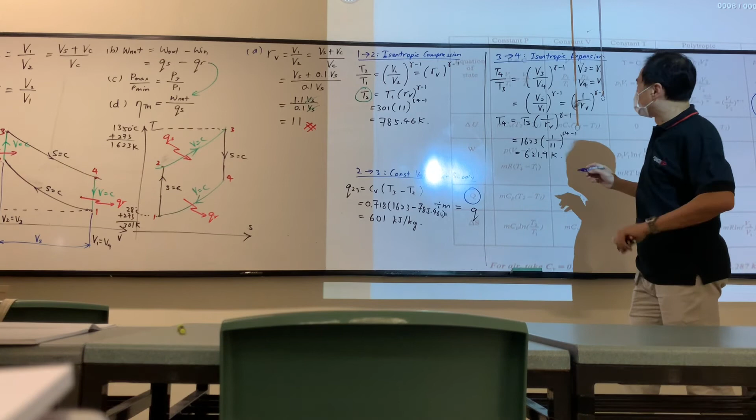Yeah, until here, any question? So we are up to this point here, point 4. So the last process, so systematically, just do it step by step, don't jump, then you won't go wrong. The last process is from 4 back to 1. So this is constant volume process, but this time around is a heat reject.

Okay, I don't need this table now, so I turn it off so you can see better. Here now is a heat reject. So what I do now, all the temperature I have already. I have this temperature, I have this temperature. So I can straight away calculate the heat reject. So this Q41 is exactly the heat reject.

Now we use T4 first, minus T1. Use the higher temperature minus the lower temperature. T4 minus T1. So T4 is 621.9 minus 301. What do you get? 230.4.

Okay, so you do this systematically, everything will be automatically calculated for you, systematically. So you can notice as you go along, your heat supply you calculate already, your heat reject you calculate already. Okay, so it's easier for you. But I haven't covered this one, but let me do part by part.

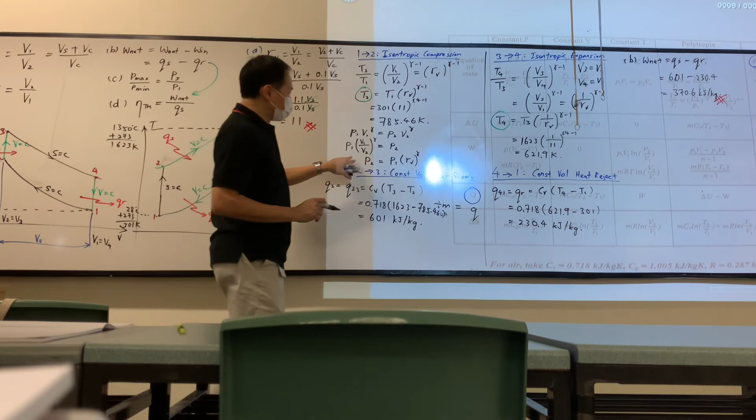That's why P2 is equal to P1 times compression ratio to the power gamma. From here you can put in the numbers and calculate. P1, the pressure, is 103 kilopascal, remember the unit is in kilopascal. Then rv is 11 to the power 1.4. So what do we have? 2956.6 kilonewton per meter square.

So now I have P2 already. Next, I want to move on from P2 to P3. This is a constant volume process, so let me show you the constant volume. Let me shift a bit. Okay, constant volume, constant volume.

Equation of state, I want to find, okay, I change the numbers accordingly. Now I'm looking at 2 to 3, meaning the numbers change from 1 to 2, then 2 becomes 3. So now I want to find this P3. P2 already found, T2 found, T2 already have from here. How about T3? T3 is given. So now T2, T3 are given, then we can find P3 already.

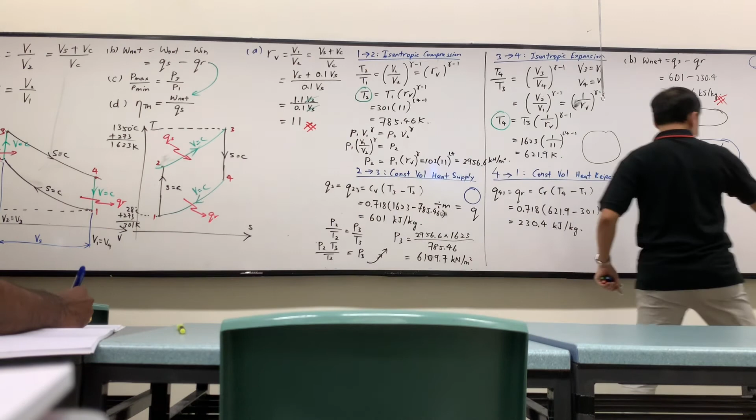Okay, so we have P3, we have P1 given, so we can calculate the maximum pressure to minimum pressure ratio. So now we can do part C. Part C, maximum pressure to minimum pressure ratio.

This is equal to P3 divided by P1. So P3 is 6109.7, P1 is 103 kilopascal. So what do you have? 59. So the ratio is 59. Ratio is 59. So after that, last one, thermal efficiency.

Thermal efficiency, so the formula is very straightforward. Thermal efficiency is always based on the net work that you obtain here divided by the heat supply. So the net work is 370.6, heat supply is 601. So what do you get?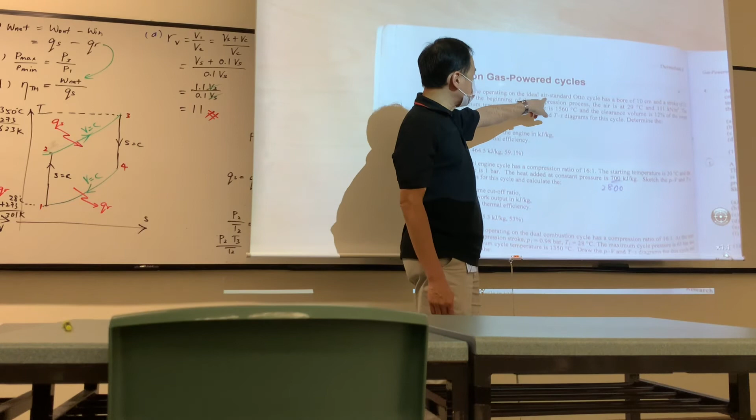So an engine operates on the ideal air standard Otto cycle, has a bore of 10 cm and a stroke of 12 cm. At the beginning of the compression process, the air is 29 degrees C and the pressure is 101 kN per meter square. Quite similar to the example given. Then the maximum temperature in the cycle is 1560 degrees C. Okay, the maximum temperature is also given to you.

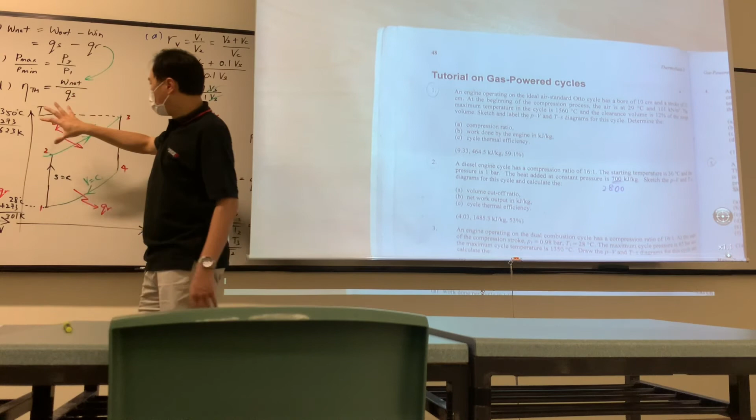Just now my temperature was 1350, now this one is 1560. Then the clearance volume, just like before, it says it's 12% of the swept volume. Then sketch the PV and TS diagram, same thing, sketch the same TS diagram, PV diagram for this cycle. Exactly what you're supposed to do is these two diagrams, PV and TS diagram.

Then calculate compression ratio, same thing, calculate this compression ratio. This is the first thing you must calculate, if not given, this one must be calculated. Then calculate the net work, same as what I just did. Then calculate the thermal efficiency. So you notice, they never ask you to calculate what? The pressure ratio, this one they never ask you to calculate. So if they never ask, you can skip this part. This part you can skip, this one you can skip, this one you can skip.

Because they never ask, so you can skip. If you do the time, you can skip this part. Those brackets are in green. So you just need to calculate the temperature, calculate this one, calculate the temperature, calculate this one. The green one you can skip.

Okay, so it's the same working method. Okay, so you try first. Try this question.

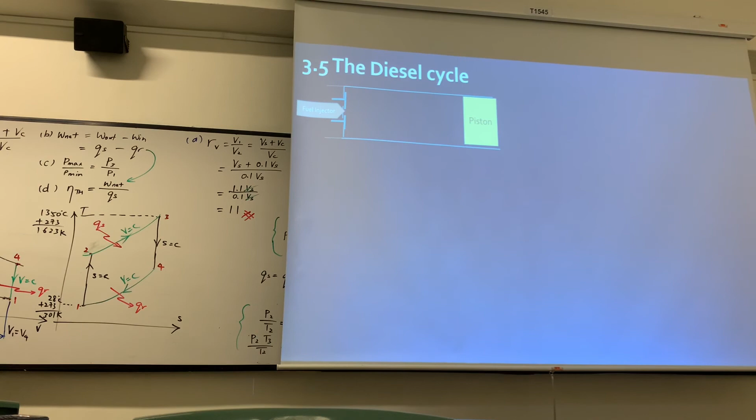Okay, diesel cycle, I just give you some introduction. I'll cover the detail next Monday, but at least I'll give you some introduction first. Okay, diesel cycle is the heat supply is at constant pressure instead of constant volume. Okay, it's not under this guy. This guy, his name is also diesel, but a different guy.

This guy is the modern guy. Looks very handsome. So it's under this guy. And this guy again is a very poor guy. Really poor. You guess, you look at the name, you can guess from where.

Okay, so this guy invented this diesel cycle, where the heat is supplied at constant pressure instead of constant volume. So how this thing works is you have the same isentropic compression. Same isentropic compression, but you notice that I purposely drew this very long. Why? Because diesel engines normally have a very high compression ratio. Diesel engine normally the compression ratio is very high. That's why I purposely drew this very long. Okay, so you compress the air until very high pressure and temperature.

Then in the diesel engine, you have this fuel injector. You never see a spark plug. So the moment you see only a fuel injector but no spark plug, confirm it's a diesel engine. Confirm it's a diesel engine. So then this fuel injector will spray the diesel fuel in oil mist form into the chamber, and combustion will take place straight away. No need for a spark plug. So the moment it's sprayed, combustion takes place.

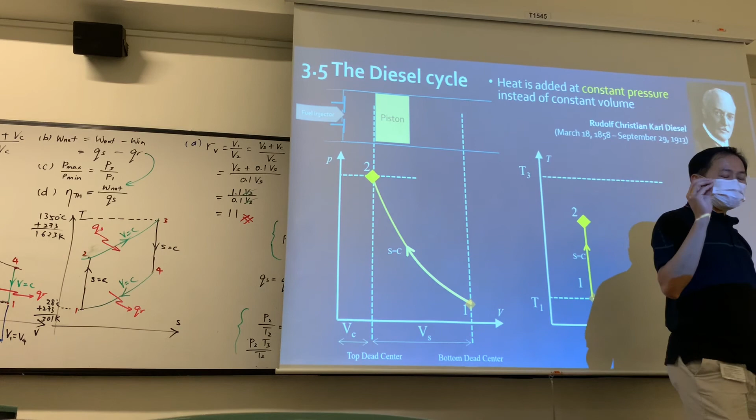But because diesel is not so volatile compared to petrol, not so volatile. What do I mean? Very simple. If you take 2 cups of fuel, one is diesel, one is petrol, and you put your lighter on top, which one do you think catches fire first? Petrol, because petrol is very volatile. Okay? Petrol is very volatile. So diesel is not so volatile. But that doesn't mean diesel is not flammable. Diesel is still flammable, but just that compared to petrol, it's not as volatile. So that means when you spray the fuel inside, the combustion takes place slowly.

So you have a constant pressure process. Okay, constant pressure process. So then the fuel cuts off at this point. So no more combustion, no more combustion. But the pressure is still very high because it's constant pressure. Temperature is also very high. Then you let this hot air inside continue to expand until it reaches the bottom dead center. So it continues to expand.

When you come to bottom dead center, you have the same constant volume heat rejection. So calculation-wise, there will be some slight change, but the format is more or less the same. Instead of constant volume, I change this to constant pressure, so now this one becomes constant pressure.

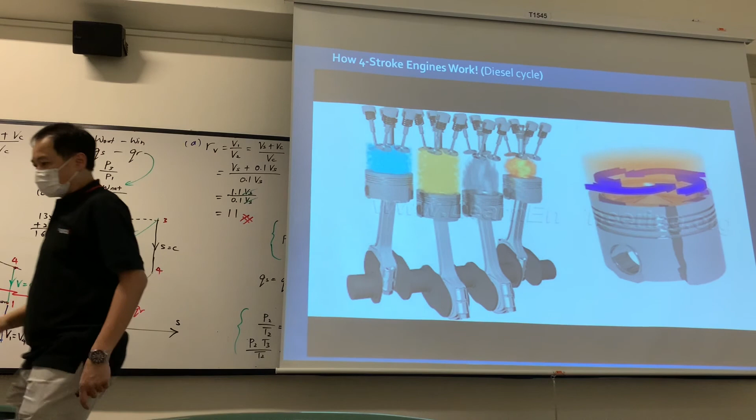An internal combustion engine transforms the chemical energy of fuel into mechanical energy. These engines, which have served mankind for over a century, are the most versatile and economical IC engines. To release the chemical energy in diesel effectively, an atomized form of the fuel is made to contact high temperature, high pressure air. This energy is effectively transferred as mechanical rotational energy. The operation of a diesel engine is all about producing high temperature and high pressure air continuously. We will see how this is achieved in this video.

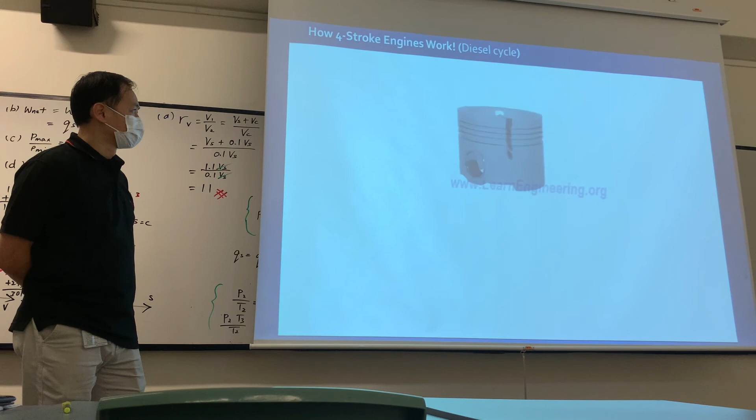Piston, connecting rod, crank, and cylinder form a mechanism called a slider crank mechanism. Here, the linear motion of the piston is transformed to a rotary motion at the crank. In an IC engine, this mechanism is properly supported in an engine block.

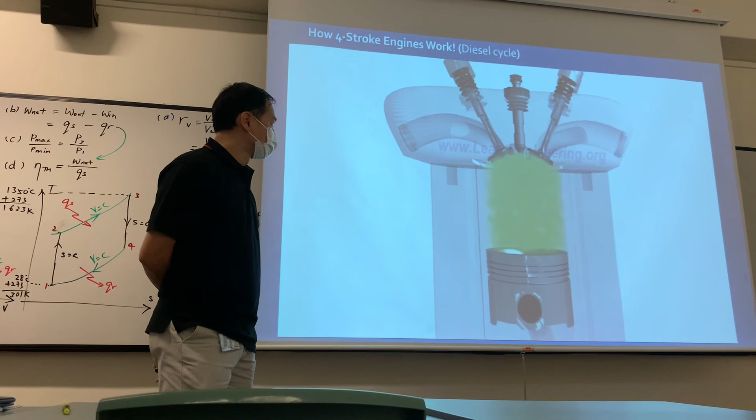Cylinder head, valves, and fuel injector are fitted above the engine block. When the piston moves downwards, inlet valves open and fresh air from outside is sucked in—in other words, the engine breathes. During the return stroke, inlet and exhaust valves are closed, and the air inside the cylinder gets compressed.

During the compression stroke, the piston does work on the air, so the temperature and pressure of the air rise to a level higher than the self-ignition value of diesel. An atomized form of diesel is injected into this compressed air. The fuel evaporates and undergoes an uncontrolled spontaneous explosion. As a result, the pressure and temperature rise to a high level.

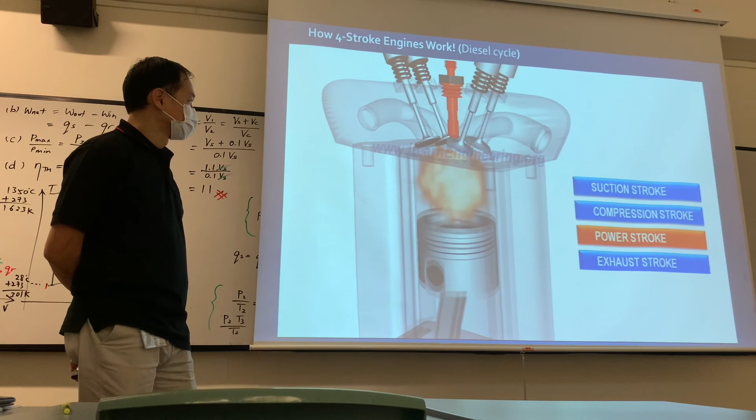The high-energy fluid pushes the piston downward. The hot air does work on the piston, and energy in the fluid is converted to mechanical energy of the piston. This is the only stroke where the piston absorbs power from the fluid. Due to inertia of the system, the piston moves upwards again—this time the exhaust valves open and the exhaust is rejected. Then the suction stroke happens again. This cycle, with a total of 4 strokes, is repeated over and over for continuous power production.

You may have noticed that a bowl is provided on top of the diesel engine piston. During the compression stroke, this bowl helps produce rapidly swirling air. Thus, the injected fuel gets mixed with the air effectively.

The mechanical design of IC engines, particularly diesel engines, is a challenging and interesting task. Since the combustion process in diesel engines is never uniform and smooth, they are prone to more vibration and noise compared to petrol engines. Thus, diesel engines require a rugged structural design.

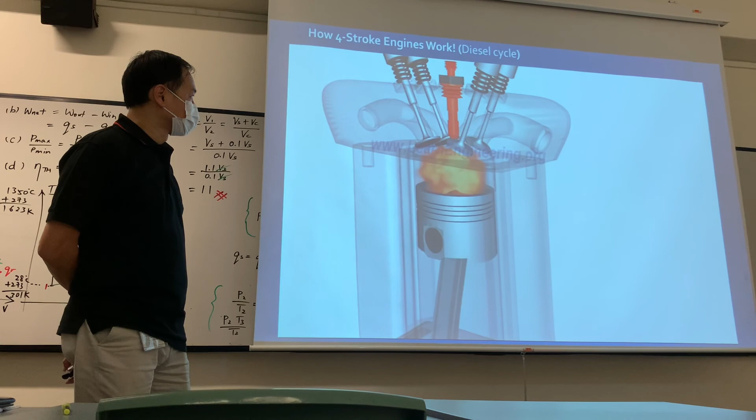Consider this 4-cylinder engine. Here, 4 different strokes can occur at a time, so the power stroke is always present in the engine. As a result, a 4-cylinder engine will have better force and power uniformity. In short, the more cylinders an engine has, the smoother it will operate. A 4-cylinder engine generally operates on the following firing order.

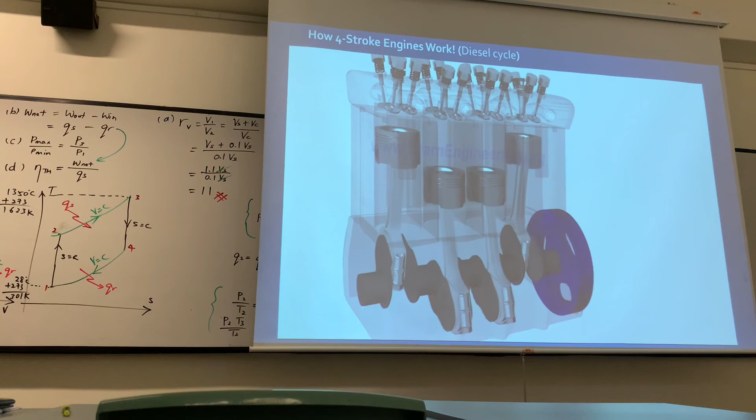A heavy flywheel, which acts like a power reservoir, further helps in smoothing out non-uniformity of power. A huge unbalanced force arises in the form of dynamic unbalance due to the excessive mass on the connecting rod side. This is negated by providing a counterweight on the crank side.

Opening and closing of valves are accurately controlled by a pair of camshafts. Camshafts derive motion from the engine. It is clear that the camshafts need to rotate at half the speed of the crankshaft.

We hope you had a nice introduction on the working of diesel engines.